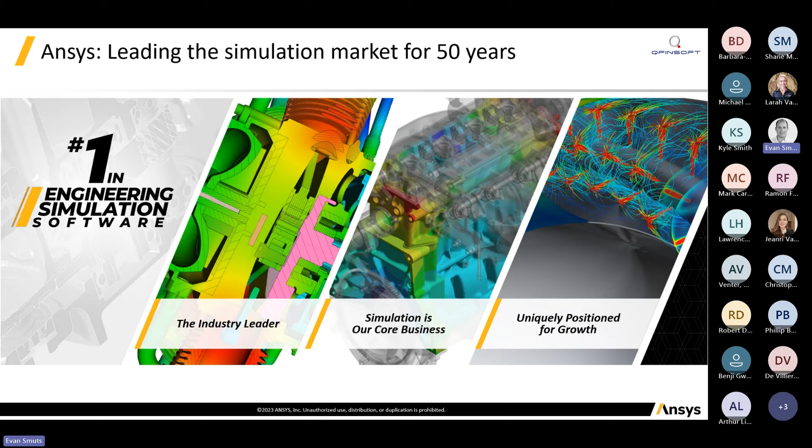And more specifically, how do we integrate those products together to give you guys the best experience and the most efficient workflow that we can. So thinking a little bit more about the bigger process, as users, we tend to get stuck in this one area where we're just simulating our particular product. But that is often just part of a much bigger workflow system.

We need to connect our simulations of certain components. We need to consider maybe different materials, what materials are available to us, what are we allowed to use, and those kind of considerations. Also, how do we then integrate our component that we're busy designing into a much larger system? So we talk about things like model-based systems engineering, and it's about designing our component as part of a bigger system. So essentially simulating the whole system.

Those aren't necessarily all Ansys simulations. Those can be brought in from other packages as well. And then it's also about linking that as part of a much bigger design management process. So we've got our SPDM, our simulation process data management system. How do we share our simulation knowledge and findings with the rest of the team? And then as they make changes, how do we receive those?

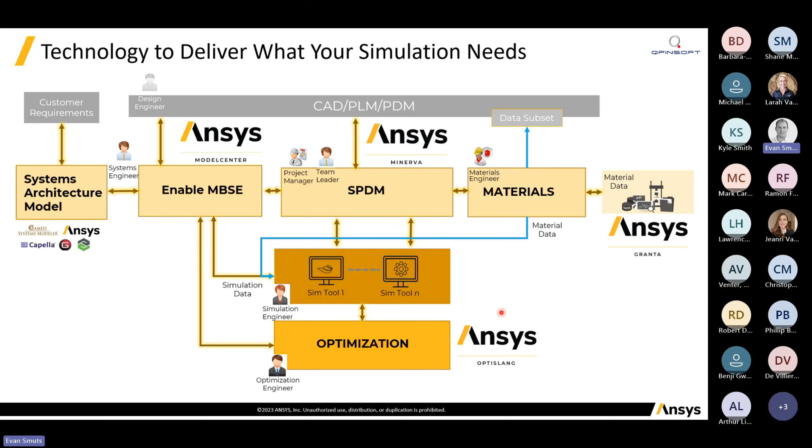So there's a much bigger system at work here. So just keep that in the back of your minds. But for today, we're going to focus mostly on the optimization side of what Ansys can offer. All right, so when we talk about optimization, what exactly do we want to do and how can we achieve an optimal design? So starting off, most people just think of a single design point that they operate at, and they want to find the best design at that particular operating point.

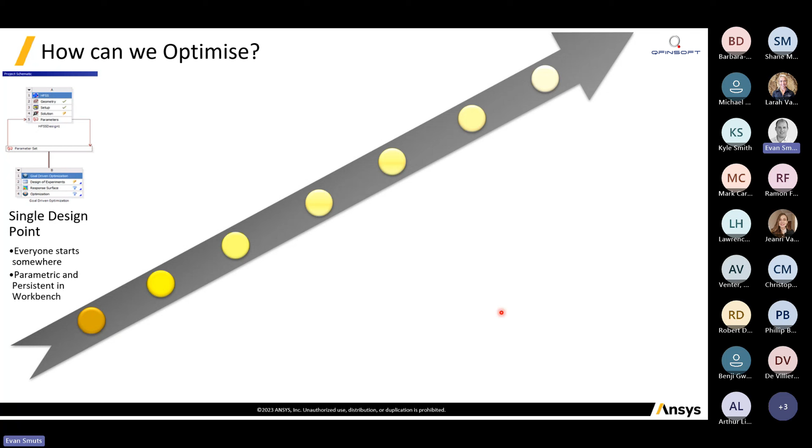But sometimes we need to understand that design point a little bit better. And so that's when we can look at something like sensitivity analysis. So this is where we try and identify what are the most important parameters in our particular design. So we look at certain variables, certain parameters, and we can see how they are linked together. Are they tightly linked or very loosely linked? Which parameters have the most effect on the design that we have?

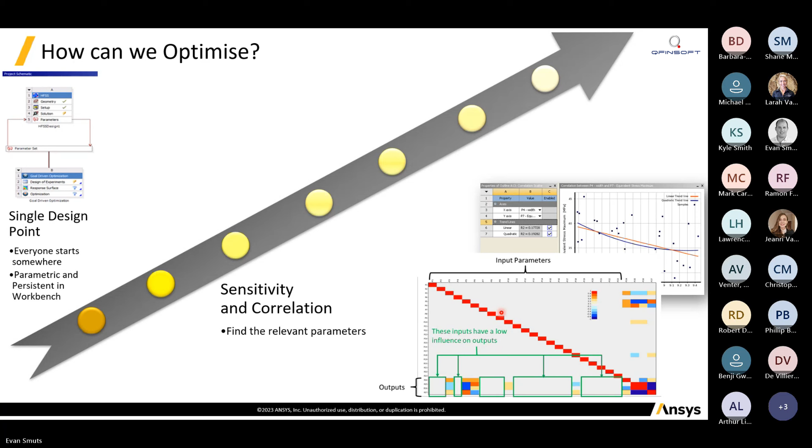Okay, so you could do that either with one design or with many, but sometimes we need to say, what if we change the design? How does that affect our goals, our target requirements? And so we need to then run a much larger study of multiple design points.

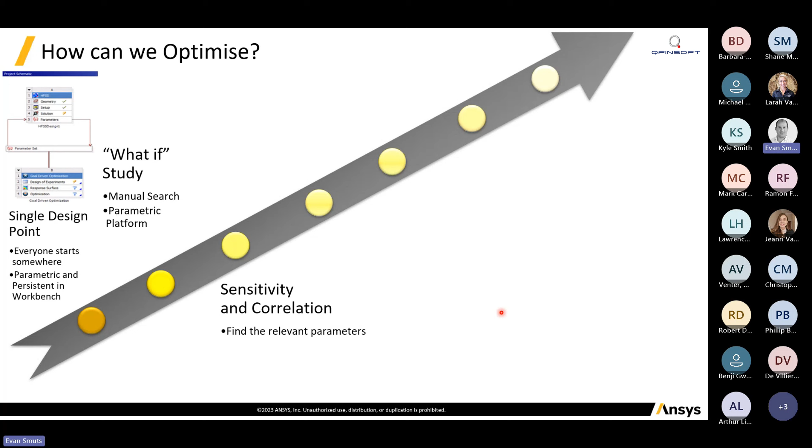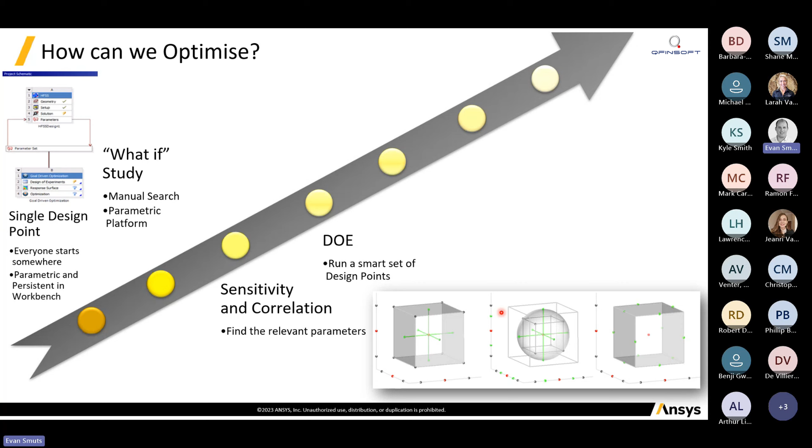So we can get some help in this using a design of experiments analysis. So this helps us identify how we can minimize our set of parameters going into the model, so that we don't have to run hundreds and hundreds of different combinations of design points. Okay, so this just helps us to minimize that field of inputs so we can get to our answers more effectively.

Then from there, we can take all of those many simulations that we run, and we can put them together into a response surface. So we build some sort of mathematical model of how we piece together all these individual simulations and try and get a general trend of how our design behaves. So we can start seeing, are these points that we've selected the most optimum design, or are they still far away from a potential high or optimum point that we can operate at?

Then once we get a sense of what is the design space we're working in, we can look at optimization. So either using the response surface from before, or just with other targets or inputs in mind, we can then go about trying to find what is our combination of design parameters that will give us our most optimum design based on our target design goals.

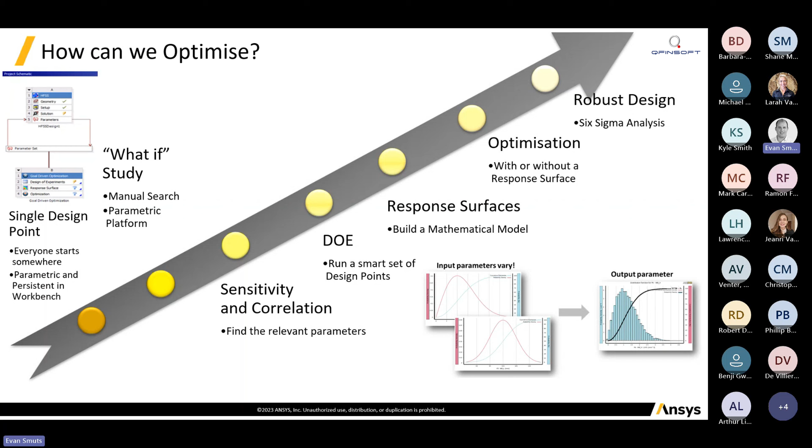Okay, and then lastly, we can look at something called the Six Sigma analysis, or Six Sigma is part of something we call robust design. And this is about understanding how robust our design is, how likely is it that we will actually operate at this design point. It's all very well we've optimized our design, but if it's an unachievable design, then it's also not very good to us.

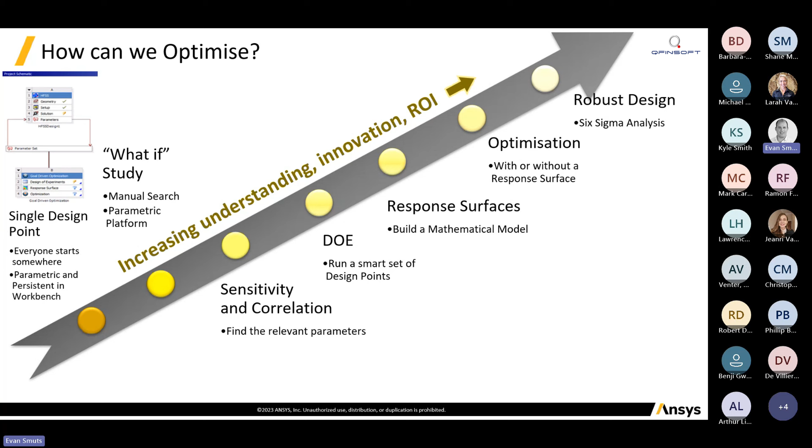Okay, and obviously as we move along here, we find that we get a much better understanding of our design and where we're operating, and obviously that leads to more return on investment. So as much as it's a lot of extra work, we do get a lot more value from this type of analysis. So just about understanding what needs to go into achieving these goals.

Okay, and then within the Ansys space, most of our products do have a basic parametric analysis tool within them, where we can set up our design space of all of our different points that we want to consider.

So particularly with products like Discovery, even the electronics products have something called Optimetrics that can manage this process where we've got multiple design points that we need to analyze, so that we don't have to go and set up like 100 different designs. We do it once and just change a few parameters from there. So obviously that's the most basic type of analysis that we can do. So it's a very manual process, but it might be a good start for a lot of people.

Then some of our products have a bunch of tools that we can think of as analytic derivatives. So this is where it actually looks at our field values that we've calculated through our simulation, and it allows us to actually change and adapt our model based on that. So something like HFSS, we can actually compute the derivatives of the S, Y, Z parameters, and then we can make instant updates to our design parameters to just tweak those values to a better setting,

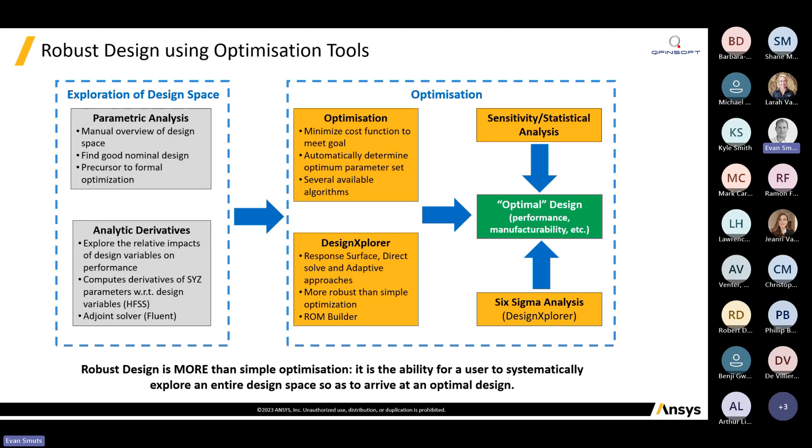But another point I want to make is that a robust design is much more than just a simple optimization task. There's a lot more than just looking at a bunch of different designs. And that's what leads us into the rest of the presentation that we're going to see today.

We often find, in product development today, there's three main challenges. We find that to get the best product, we have to put in a lot of manual work, and it's a lot of iterative process back and forth, and that can lead to quite a slow time to market. To overcome this, we need to somehow find a way to increase efficiency, try and automate things, and get results out faster.

We find that also we have lots of requirements that we need to meet, and how do we juggle between all these different, often conflicting requirements? And so, we need to find a way that we can identify the most important parameters to find the best trade-off and improve the product performance.

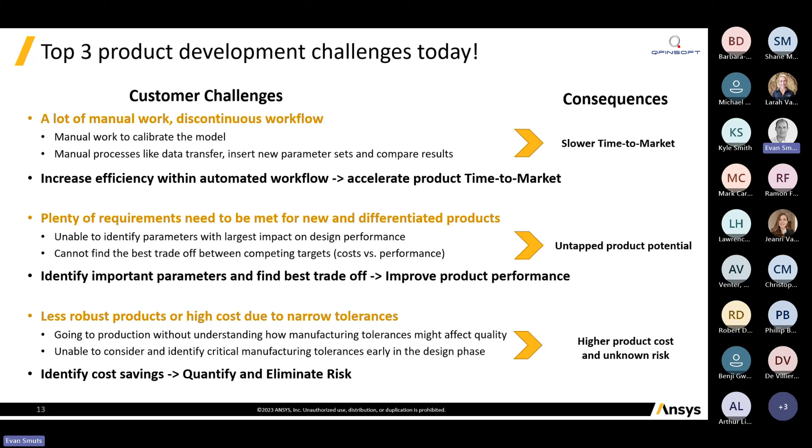And then, very importantly, we need to consider that the products are robust from a structural point, but also can we actually manage to build these, or maybe the tolerances are too high or too costly to achieve the goal that we're trying to achieve. So we need to identify areas of cost savings so we can quantify and eliminate any risk in our design analysis.

And this is where this PIDO philosophy comes in, this process integration and design optimization. That's what it stands for. So on the left there, we need to consider how do we integrate this optimization into our process?

How do we connect the different tools together to get a design that works across the board, not just in one specific package or physics analysis? How do we automate this kind of process to make it faster and more reliable? And how do we obviously make this a much easier process as well?

Then on the right, design optimization, that's the actual hard work of optimizing the design. So how can we achieve that goal, but hopefully reducing some complexity in terms of the work to get there, and maybe even the design itself? And then how do we verify that this design is actually a design that we can meet and actually manufacture, and does the job reliably every time? And obviously this is with these goals of shortening the time to market, improving product performance and eliminating risk.

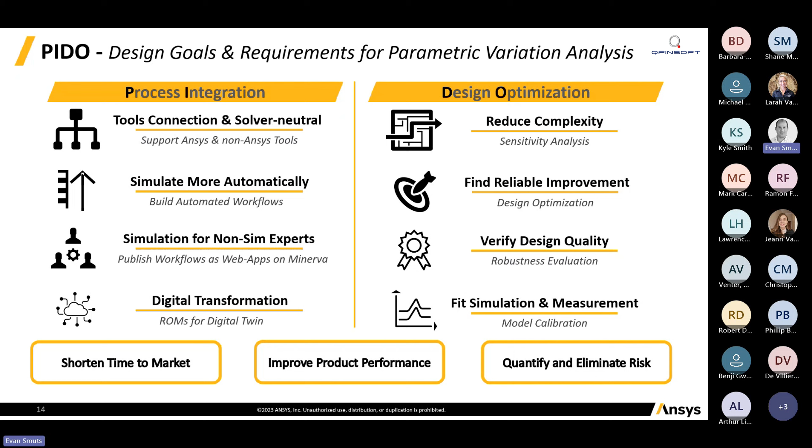So within this kind of workflow, there's a couple of different ways we can arrange this, depending on what works in terms of your company and what your end goals are. So obviously we need to find a way to integrate these workflows, hopefully try and automate them, speed them up. But then it's also how do we get that information to our end users? Maybe we need to publish them in some sort of web platform where they can access this information remotely, or is it just about publishing the information locally to our colleagues in the office?

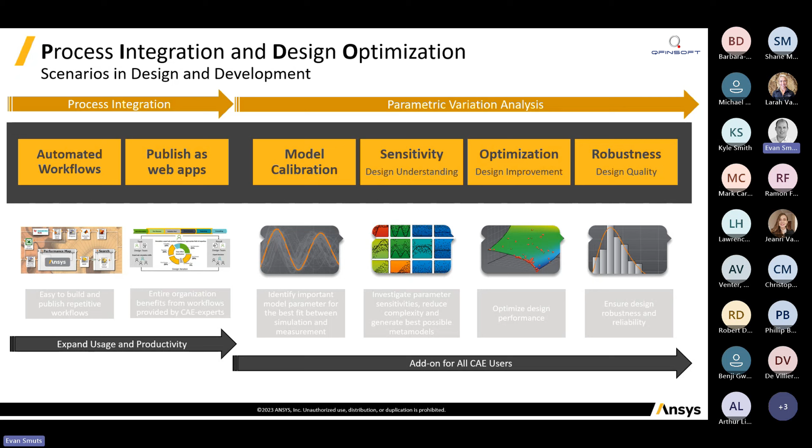Okay, and then how do we link that with a parametric analysis as well to optimize our design? So do we bring the parametric or the optimization analysis towards the end of our workflow, or do we somehow try and work it into the process? So obviously we want to automate, but do we automate and then optimize and only then release our results?

But maybe a more optimal workflow would be to actually try and parameterize and optimize our design up front, so that we can then knock out all the designs that we're not interested in, focus on the areas that are important to us, and only then do we try and automate things and then publish that information to our other users or clients.

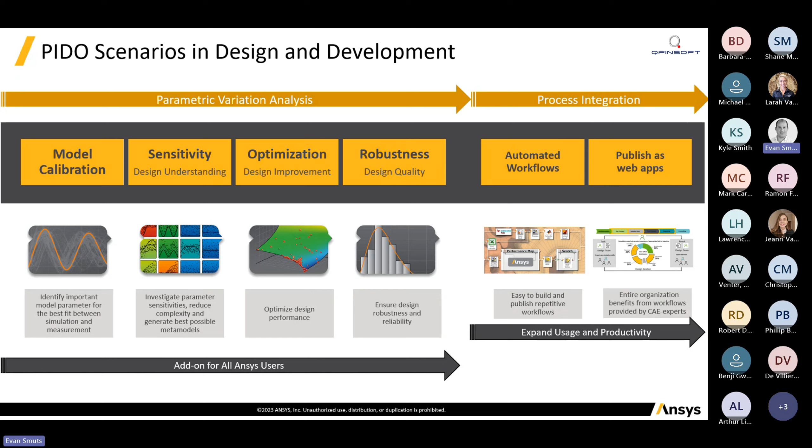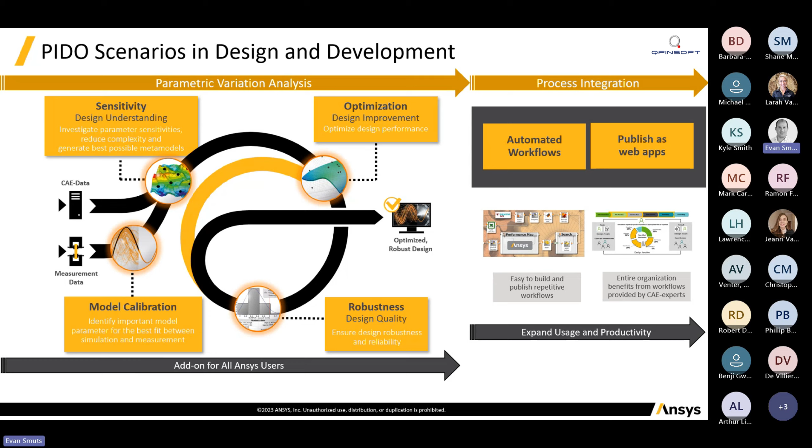Okay, and however way you slice it, we feel that for the whole optimization process, we need a really good solid tool to work in this space to allow us to provide an optimum design that's robust and also hopefully well automated to make life easier. And this brings us to the main focus for today, looking at a product we call optiSLang.

Okay, so this is a platform that we have to build up these workflows for parametric analysis. The idea is that it's super flexible. It can be coupled to multiple different solvers, not just Ansys solvers, but also third-party products as well. Something like MATLAB, Abaqus, maybe other CAD packages as well. They can also be integrated into this whole workflow. So the idea is we make it universal and easy to use by pulling in all these other different products.

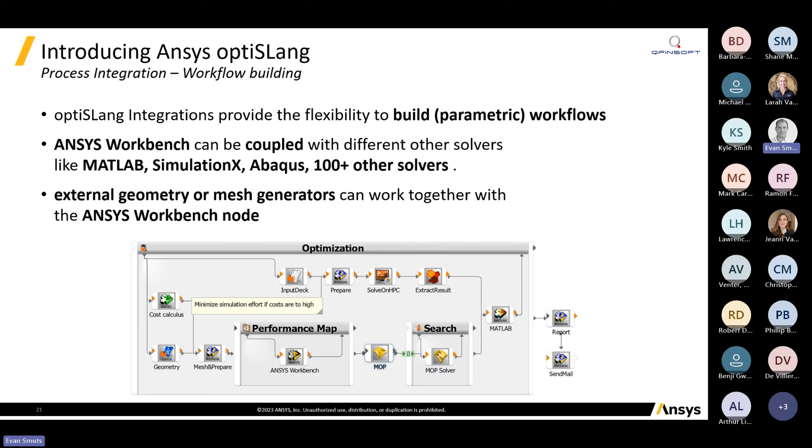So how do we go about integrating optiSLang into our workflow? One of the easier ways to do it is to work from the Workbench plugin. This is where we are working in the Ansys Workbench environment, which I'm sure many of you are familiar with, creating different design workflows, linking different physics packages together. We can now build our optiSLang analysis off this design.

Okay, so once you've set up your initial design, in this case a static structural analysis, and once we've defined a whole bunch of input and output parameters, you will see this parameter set block here that will be available in Workbench. And then we can link all of our different optiSLang analysis blocks to that. So doing a sensitivity study, optimization study, whichever combination we feel we need to do, that becomes available there.

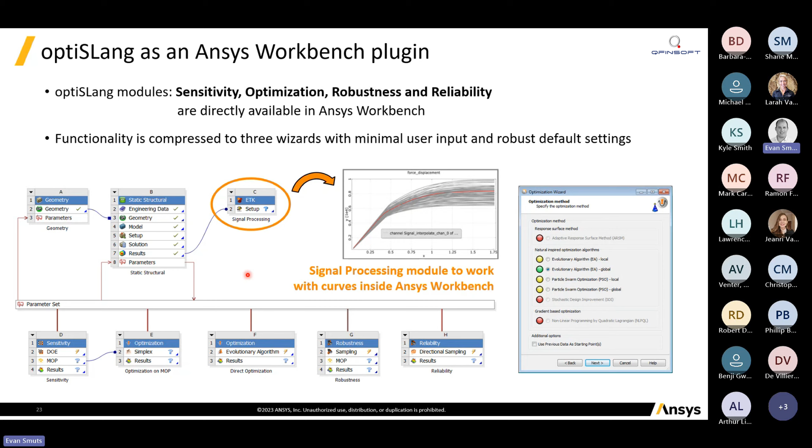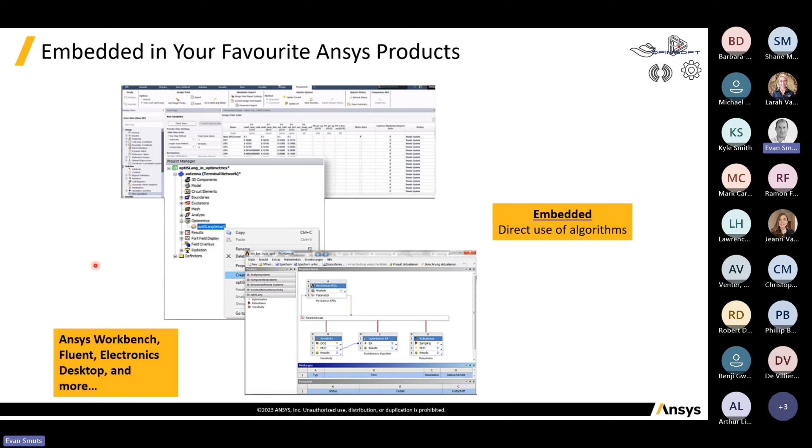All right. So the idea is to make it easy to use, so that you can work in whichever interface you feel happy with. So it's not just working from Workbench. Certain of our products actually have optiSLang integrated into the user interface. So, for example, Fluent or electronics products through optiMetrics, there's a direct link to optiSLang so that you can work in whichever environment you're most comfortable in to set up your analysis.

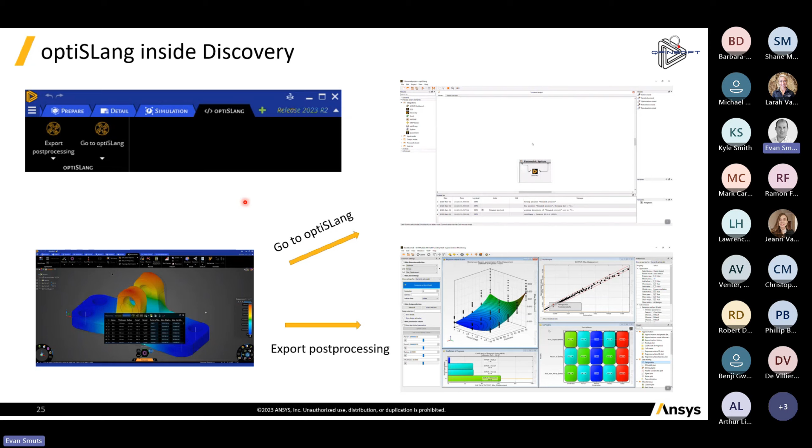So we can either export our data and open it up later in optiSLang, or we can actually load optiSLang directly, and a Discovery connecting block will actually be created in optiSLang, and then we can work from it there and integrate it into a more detailed analysis. And then obviously we can work within the optiSLang GUI environment as well.

So the idea is that it's sort of a blank slate. It's very similar to Workbench, in that we can drag and drop in different modules depending on the type of analysis we're doing. And so it allows it to be quite flexible and easy to use to customize whichever type of analysis that you're trying to do.

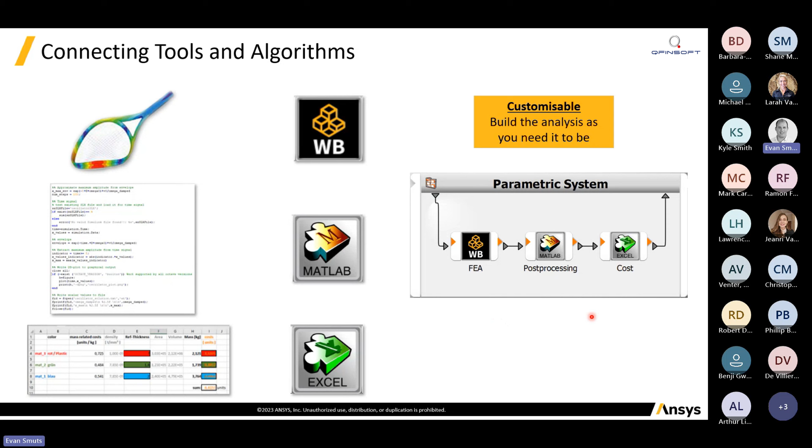So, for example, if we want to bring in our Workbench model here, maybe a finite element analysis, we can then have maybe a MATLAB script to either optimize the design or measure something from the design that we've created. And we have maybe a cost function within Excel. So here we've built up our model piece by piece, and created our own custom analysis.

Another nice example here is bringing in Granta for materials analysis. So we have our materials library feeding Discovery, and then we actually have both a cost and a carbon calculator from that, so we can quantify how good our design is from a cost point of view, but also from an environmental friendliness point of view. Changing materials might affect that, but still give us the performance that we require from the component. So we can get quite creative.

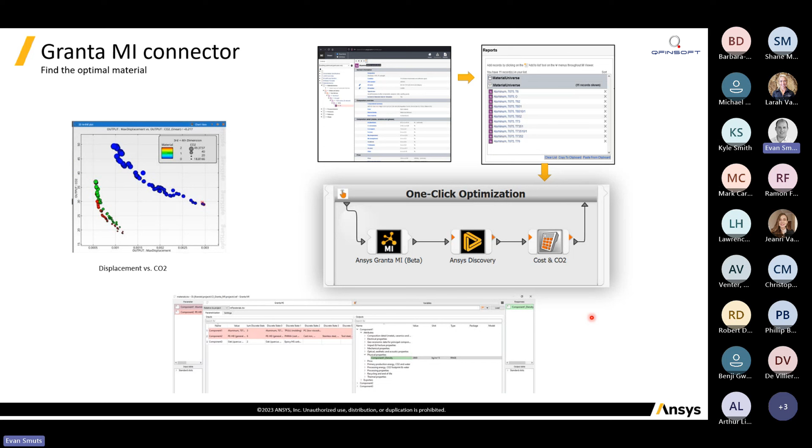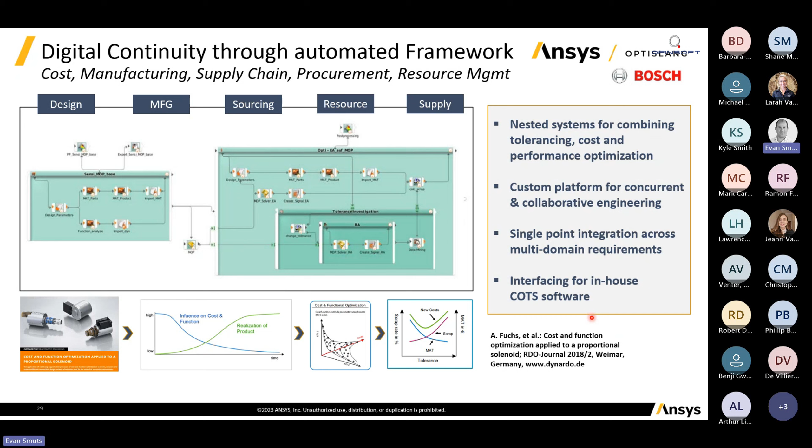Okay, so how does optiSLang work, and what is its functioning? Because we'll see some of this terminology over a few more slides down the line. So basically, optiSLang works on something we call a meta model. A meta model is essentially just a model of a model. Meta modeling is the process of generating these kinds of models.

So the idea is that optiSLang will build these meta models from our analysis, and the idea is to give very quick feedback. Obviously doing a full 3D simulation is quite time consuming, but if we can work on a much higher level, simpler model, we can get much better feedback much more quickly, and then we can analyze a lot more different designs. Okay.

So typically, when we work with hundreds of different parametric designs, we need to say, well, what happens in between the design space? Maybe there's an optimum that we don't really know exists. But obviously, we need to try and automate this. And this is where the meta modeling approach comes in and says, okay, how can we just mathematically describe our design space? But then also, how do we link all of our different criteria together?

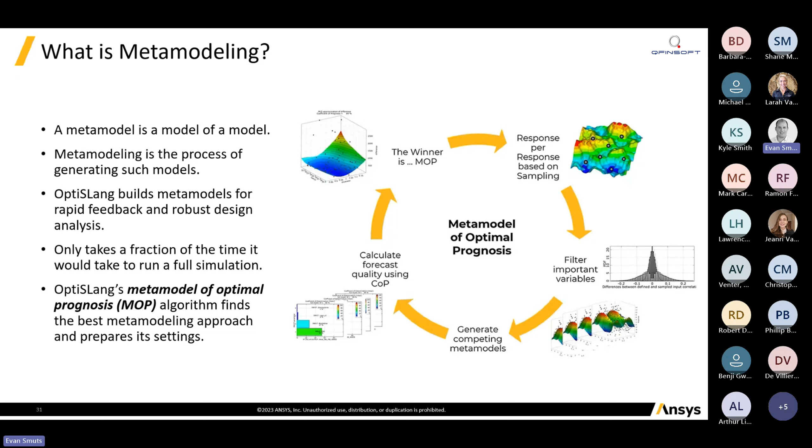So the idea with using these machine learning algorithms is that we use them to guide the simulation, to find the most optimum design and try and get rid of any random results or results that don't meet our design criteria. And this way we can improve efficiency and also get to the important criteria of what actually drives our design, and then we can understand our design much more deeply.

So finding the best meta model approach can actually take a lot of time. There's a few different methods out there. I should actually talk about the MOP. We talk about a meta model of optimal prognosis, the MOP. So this is just the name of the meta model that we use within optiSLang.

So it's based on essentially an automatic machine learning algorithm that finds the best approach to actually get us the result. So it takes a look at the design, the data set that we have, and looks at certain criteria, and that way it can find the best meta model that we need for our particular analysis. And we call that the adaptive meta model approach, or the AMOP, as you might see in some of the literature.

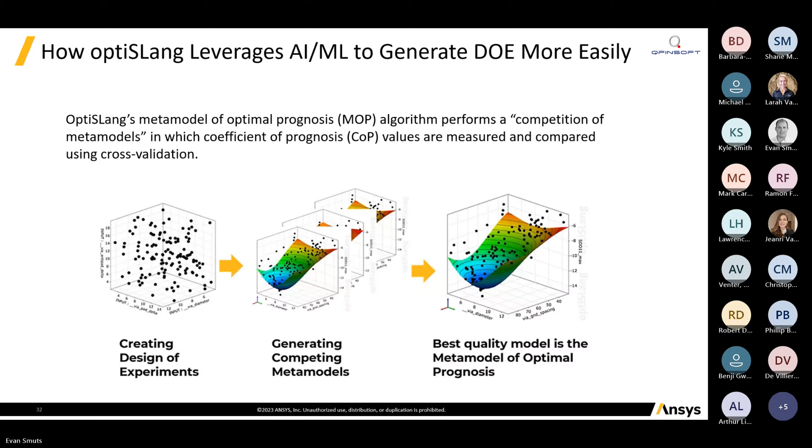Okay, so the idea behind this is that what the MOP does is it essentially runs through your design set, finds out which values have the most influence, and then it can focus in on those areas and populate more design points in those particular areas, giving us better resolution and therefore also better confidence in our results.

And then all of this happens quite quickly. In the latest version of optiSLang, we call this a one-click optimizer. So the idea is that it takes a lot of the work and decision-making from the user and looks at the results to determine the best algorithm to use. And so you can get going much more quickly, but still have the confidence that you're going to get a good answer.

Okay, so we find that, using these AI machine learning techniques in tandem with 3D simulation and also these other CAE tools, we can significantly enhance the design exploration phase and the optimization phase of our design, getting to a much more automated workflow, which will ultimately make things far more efficient.

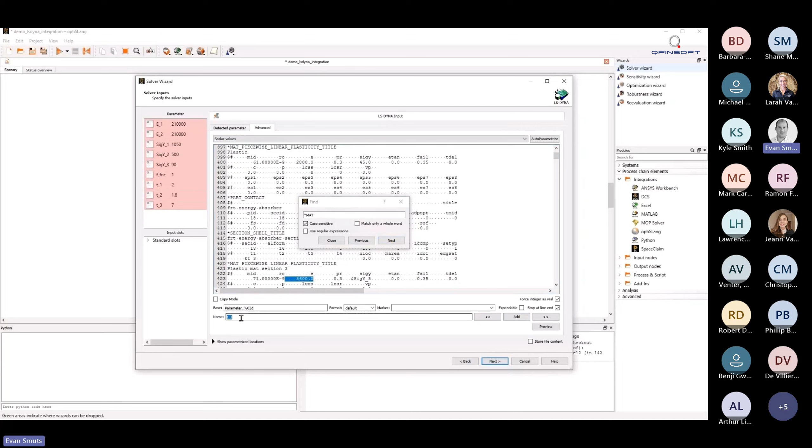Okay, so I've just got a little video here to run through the optimization process. So we'll look at the process integration part of optiSLang and how we can go about setting up a model. It's a little bit sped up, but the idea is that we can build our model from multiple different products. In this case, we're bringing in an LS-DYNA model, and we're actually using the input script from that LS-DYNA model to set up our analysis.

So our input parameters are actually copied from the input script, and then we can also define what we call the responses. Those are basically our output parameters. So once we've defined not only what the input and output parameters are, but also what range they work in, we can then define our objective function. So this is what we are going to be targeting to optimize. And then we also define our constraint equations, which basically define the limits within our design space.

Okay, and you can see here, we've created our basic little workflow with our LS-DYNA model. And then obviously we can also drag and drop additional components into it as well. So we've got our LS-DYNA solver there with an Excel cost function as well to calculate additional criteria.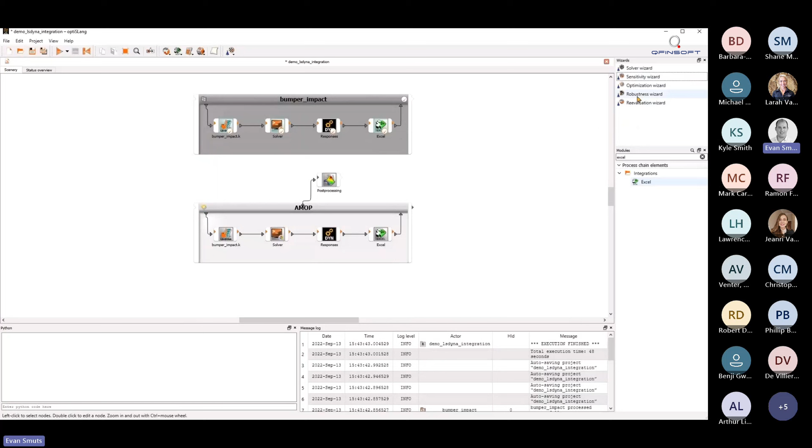And then at the end, we can also select the algorithm that we want to use to solve. In this case here, we've got our AMOP model that we've created, and we're bringing in our optimization wizard to then take that meta model, and then we're going to optimize based on that, in this case using an evolutionary algorithm. So you can see here, it's a little sped up, but the process is relatively quick and easy to build your analysis from all the different individual pieces that you need.

Okay, then looking now more at the design optimization. So what do we do with this model once we have it?

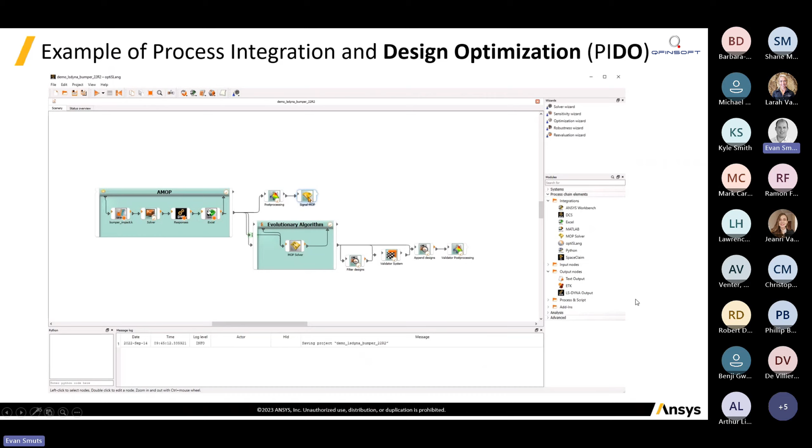Okay, so from our model, it generates an output, particularly looking at our coefficient of prognosis. This is basically linking all the design variables together and saying which variables are the most impactful on our design, which ones are the most connected, and in what sort of side of the range we are looking for the best design. And then from this, we can go and generate different types of plots.

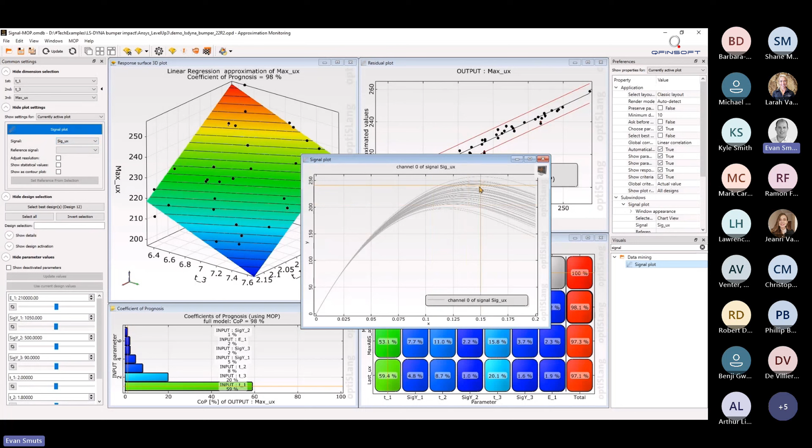So we can look at maybe all the different variations and see where we are in terms of our optimal design, so we can get a much better understanding of the design space that we operate in.

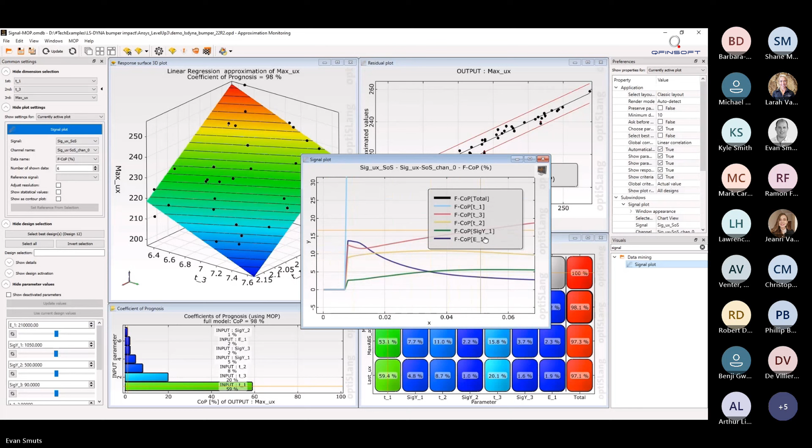Okay, now focusing on some of the more specific features within OptiSlang and what sets it apart from, for example, a Design Explorer or something like that. So obviously the basis of any task that we're going to do within OptiSlang is a sensitivity study. The idea is that we want to understand and characterize all the different variables or parameters that go into our model and see which ones are the most important, because obviously we don't want to optimize the ones that have very little relevance to our design. So we start off building our meta model and then doing a sensitivity analysis on that.

And often when we think of sensitivity, we'd look at just single parameters and see how that single parameter varies. But it's not always obvious that that value is going to give us the resulting data if we just look at that single value. Maybe we need to look at something a little bit bigger. So we can look at maybe a whole signal input, an input that varies, and see whether something within that signal actually drives our optimum design.

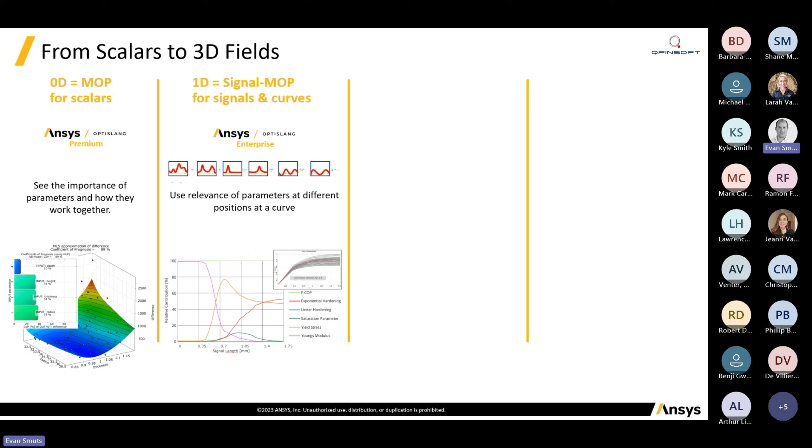Or in terms of physical space, we can also look at how a variable value varies over a certain area, maybe over a 2D surface area. How does the parameter field vary? And maybe we need to find an optimum somewhere within there. So we actually need to affect the entire surface, not just one particular point or one scalar value.

And then we can also do this in 3D as well. So it's about what is the optimum design over a whole 3D component, and not just finding the average value, peak value, something like that. Yeah, so that is quite a powerful extension over just a simple sensitivity model.

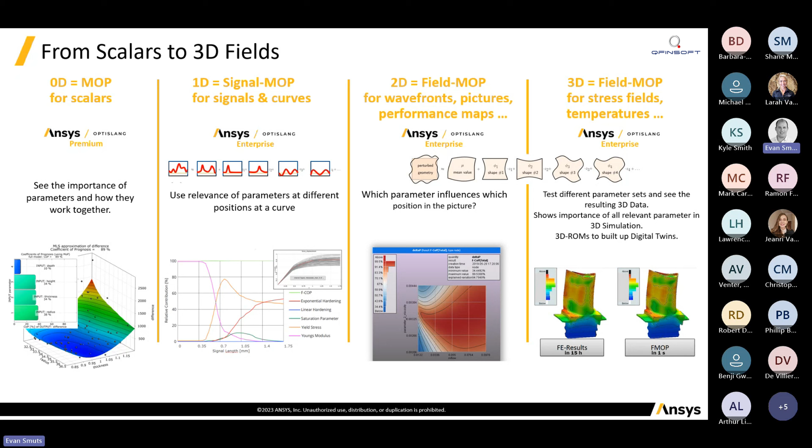We then need to consider the robustness of our design and also the quality of it. How can we actually achieve the optimum design that we have? Because obviously it's not very useful if our optimum design is not achievable, or maybe we need such high tolerance that it's just not practical or cost effective to achieve. So it's about how we can measure our design based on something more than just the optimum, something more of a quality metric.

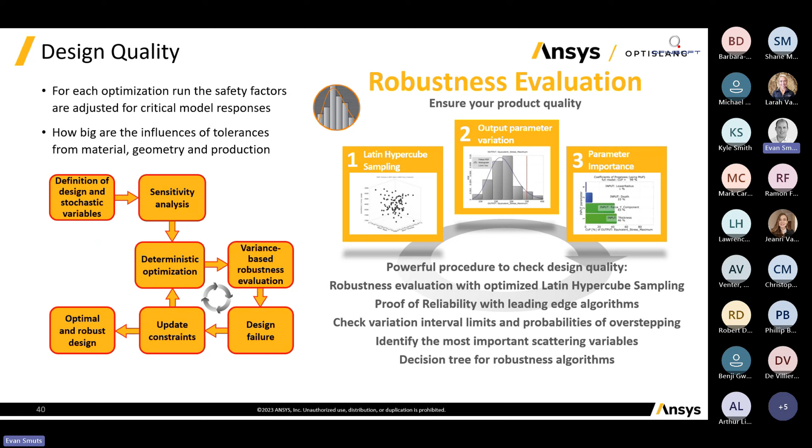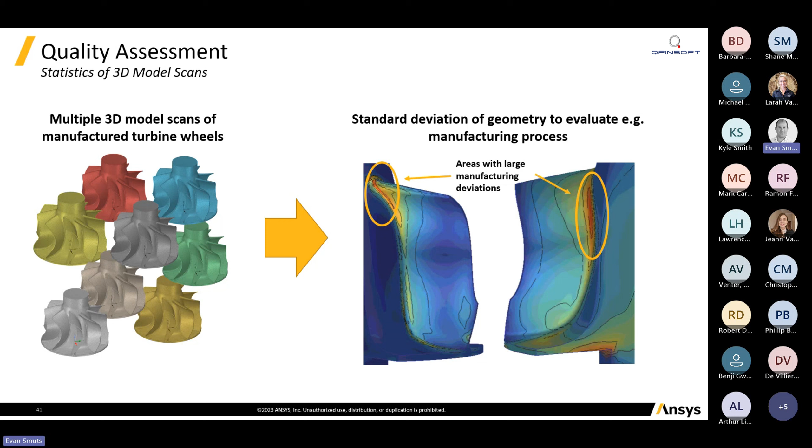So in this case here, we can actually generate a map of the areas of the highest deviation from our design shape, and so we know, okay, those areas are probably going to affect the performance because we have the least control over those specific areas.

So we can then take this shape, we generate that 3D shape from our different scans, and we can then put that into a simulation and see, okay, based on the variation that we expect in the design, what is the result variation that we're going to get?

In the case of this turbine wheel, maybe it's what is the real pressure drop that we're going to experience across here? What is the range that it's going to vary, and how bad is that compared to what we designed? Yeah, so it'll actually take the geometry and morph it into the different range of those extremes of what we've measured.

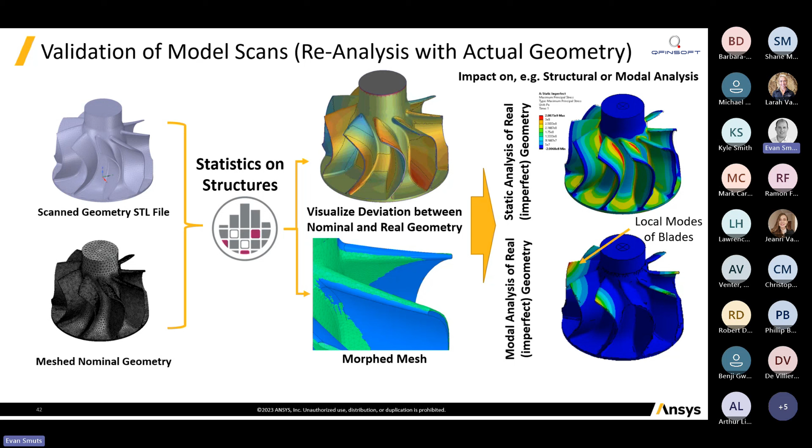Sort of a slight variation on this project done by Siemens. So this is actually looking at the turbine casing for a gas turbine. And so what they also did was measure the geometry and essentially created a sort of measure of all the different thicknesses and how they vary across the design.

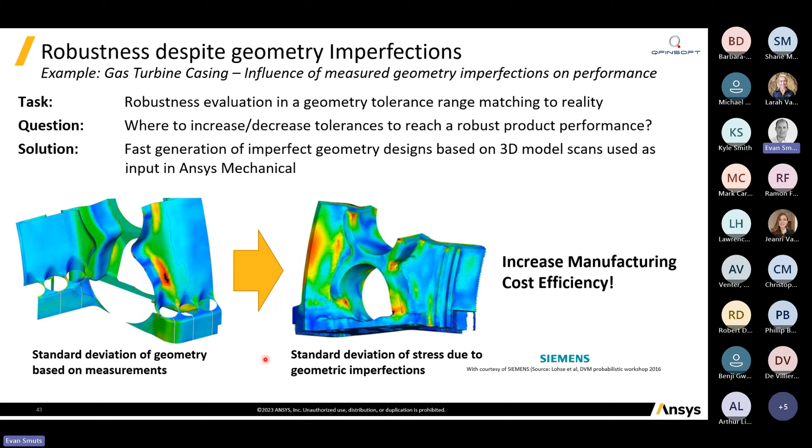And then we can go and look at, in this case, what is the range of stresses that we expect based on these imperfections in the design, or the variations in the shape that we can expect. So that's quite a handy tool to understand, can we actually meet our design targets, and can we trust the quality of our design?

Another interesting use case is looking at not only just the performance of the object, but the cost performance as well. So in this case, we have a particular design where obviously cost was a big aspect of the design apart from its actual structural performance. So considering things like material cost and manufacturing costs, we found a design that still meets our criteria of deformation and material stress and so on. But we could actually then reduce our manufacturing costs quite significantly.

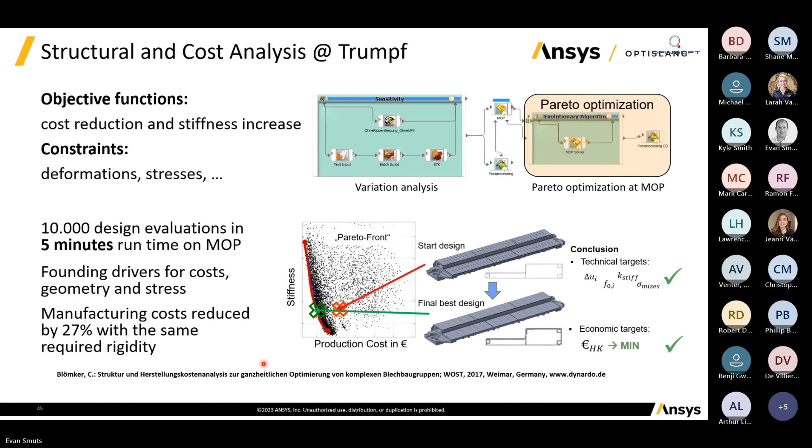All right, so it's not just about the physical structure itself, but can we look at time and cost as a metric for optimization as well? Okay, so now I want to go on to a couple of different use cases here, where we can see how OptiSlang has been used in some different scenarios.

So the first example here is looking at an electronic PCB. So we have a PCB with a few different chips on them, as well as heat sinks. Obviously, during operation, we expect this PCB to get quite hot. So how do we now optimize our airflow, optimize our heatsink components to make sure that we get a design that is going to be reliable and safe to use, and it's not going to overheat?

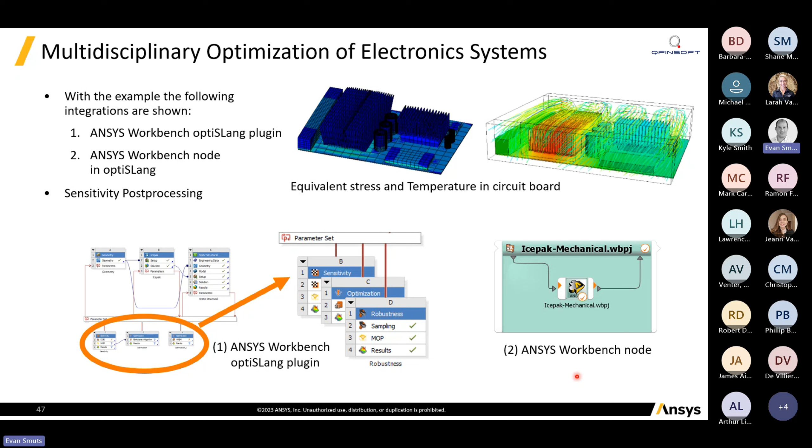So this can be done through Workbench. So we have our geometry module over there, which feeds into our Icepak thermal analysis, and we can actually look at a static structural analysis, in this case for deformation of the components due to the thermal distortion. And then down here, we can see we have our OptiSlang setup. So this can either be done through Workbench, or you can actually build in an Icepak node within the OptiSlang interface. But now specifically looking at the results.

So the goal of the analysis was to minimize the stress and deformation in the components. So that's the objectives from the FEA side. On the CFD side, we also have our own objectives in terms of minimizing pressure loss and thermal resistance. So obviously, we've got two different physics that we're considering, and both have their own objectives that we want to try and meet. Maybe this is two different design teams that are also trying to meet their targets.

So how do we now keep down the mass and the temperature of the heat sources and make sure this all works as expected? In this case, we're basically playing with the heatsink parameters, so the number of fins, the thickness of the fins, and also the flow rate. And in this case, we can even vary where we position the fans in the housing. Okay, so there's a lot of different parameters that we can change within here.

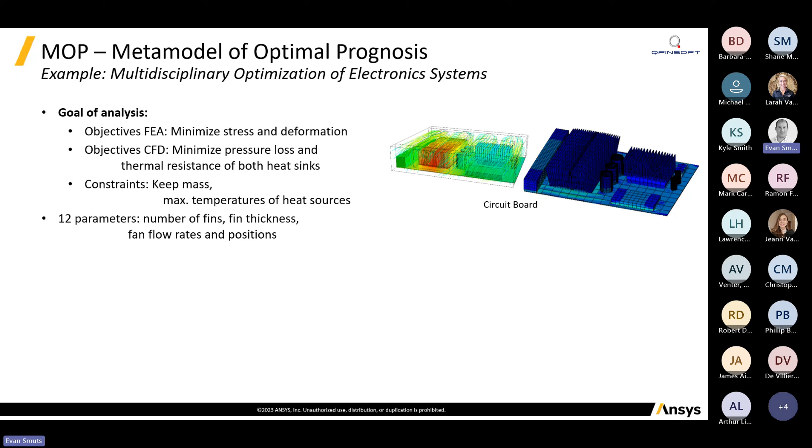So again, how do we find the best layout and what actually is going to have any effect on our goals? So here we've conducted a sensitivity analysis, in this case over 100 designs. Obviously, not all of them simulated. Some of them would be filled in with the meta model. And we can now have a look and try and quantify which of the different parameters have the most effect here.

So if we look at this table here, this is our coefficient of prognosis table that quantifies how the different parameters work relative to each other. On the bottom here, we can see the different parameters that we've tested. And then on the left here, we can see which of our targets or goals have been affected.

So from this matrix, we can see that, out of all the 12 parameters that we could change in the design, only really 10 of them have any real influence. And in this case, if we look closer, even a few of them have actually very little influence as well, if we look at the numbers, and obviously these blanks here indicate very little, or essentially zero influence. Okay.

So in this case here, we can see that, and also if we look at the response surface here on the right, we can also see that we get quite a good fit. We don't have too many outliers in our design, so we can therefore have a little more confidence in our results.

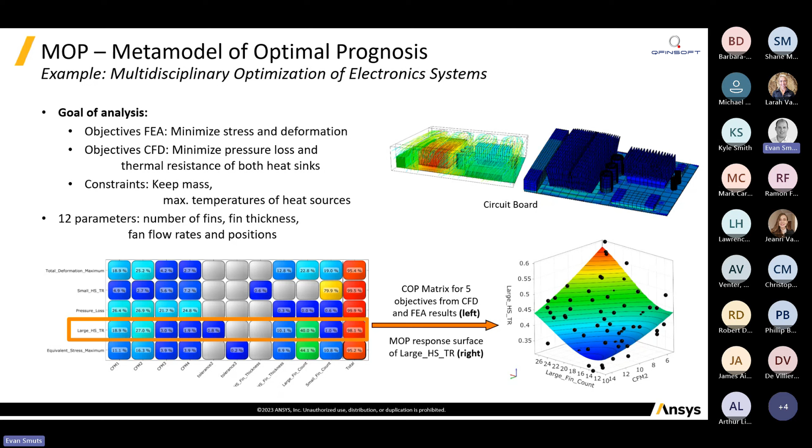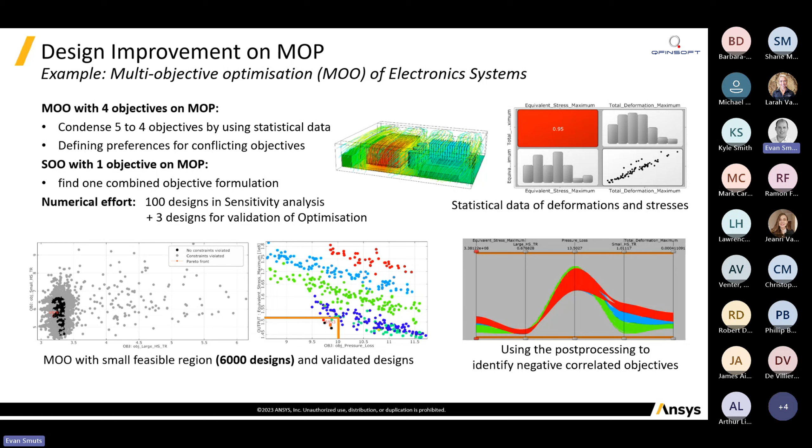Okay. So there's a number of different metrics that we can use here to analyze it. I have another little video that will just quickly run through setting up the model, as well as analyzing the criteria. So what we see now is a typical setup within Workbench, a typical parametric model with all of our different design inputs, or parameters that we've defined in the different components. So you can see there that we have a geometry block, our Icepak model, as well as our static structural.

Now we're dragging a sensitivity analysis into Workbench, and that links to our parameter set. From that parameter set, it automatically picks up on all of our different inputs and outputs that have been defined, and we can specify the different ranges available to them. Okay, so on the top left here, you can see we have a list of parameters and list of objectives that we need to look at.

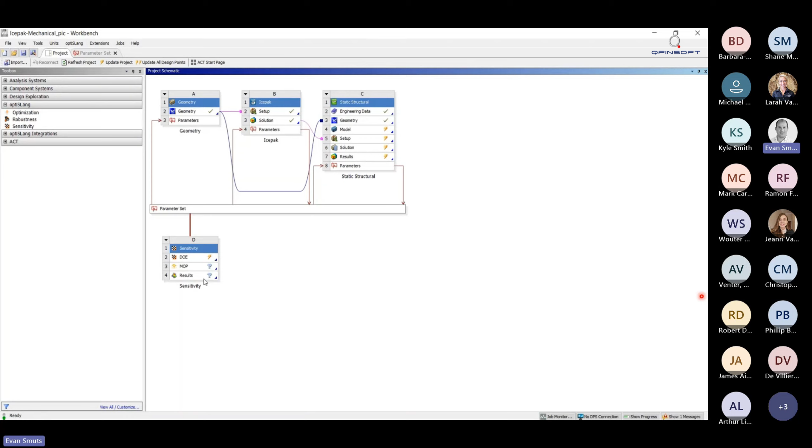And now we're defining the type of sampling method that we're using to set up our meta model. optiSLang uses that kind of traffic light system to try and guide you as to which would be the most appropriate algorithm to use for this particular case. Okay, so now that we've finished with that setup, it's just busy updating our meta model.

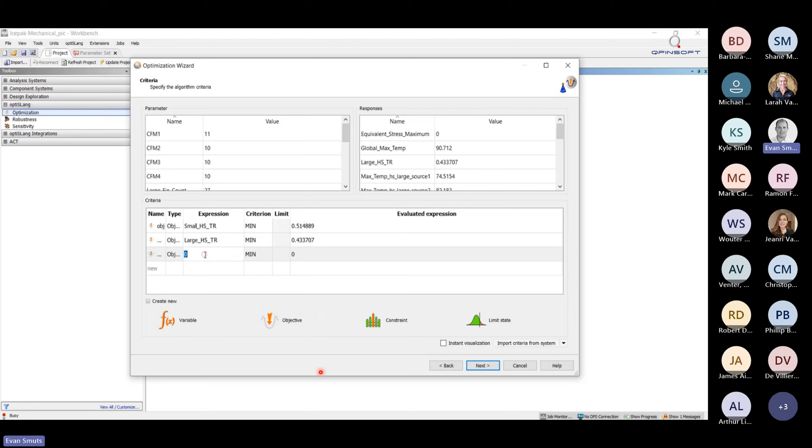And now we are bringing in an optimization onto our sensitivity study. So we've done the sensitivity study. Now we're going to optimize it and use the parameters that have been highlighted by the sensitivity study to optimize our design. Okay, so we're busy now adding certain criteria. These are our objective criteria here. These are what it's actually going to be using as a target or a goal for our design.

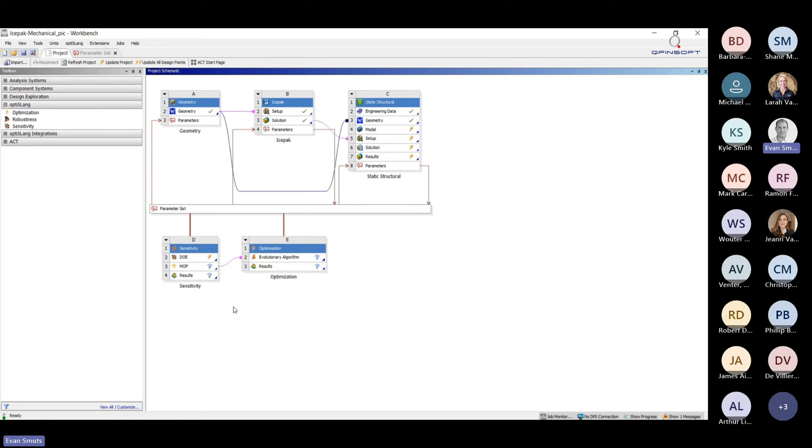And then we move into the next stage, and you can see here it's indicating that we want to use an evolutionary algorithm for our setup. Then we can update that design, and it will fairly quickly generate the optimization results for us. Okay, and so now it opens up our optiSLang interface.

So you can see here that we are now, in this case, working from the optiSLang side. We're not actually working from Workbench. So we're just defining our project within optiSLang so that we can then do some post-processing. We're telling it which are our input parameters, and which are the responses that we want to see in our output data. And then we can run our analysis.

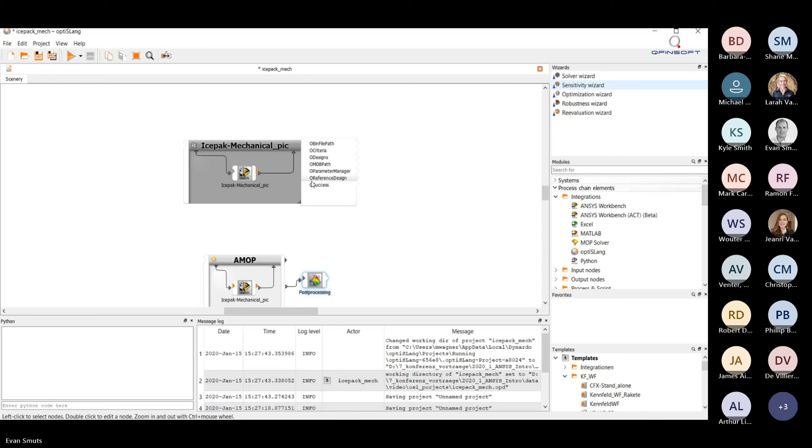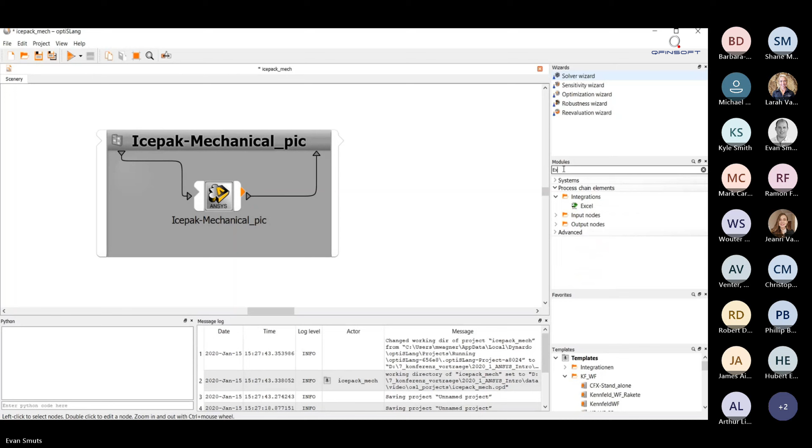Okay, so you can see it's created our Icepak mechanical workflow there, and we can add to that if we need to, so we can build and customize our design a little bit further. Now we're seeing that in the Icepak mechanical node, we can add different inputs or outputs and connect the different blocks together to build our custom model. Yeah, so we're just dragging in Excel there to help do some calculations for us.

And also a MATLAB script. So obviously, I should note that you do need these packages installed on your machine if you want to use them. We don't provide MATLAB, for example, so you will need those packages to be able to use them.

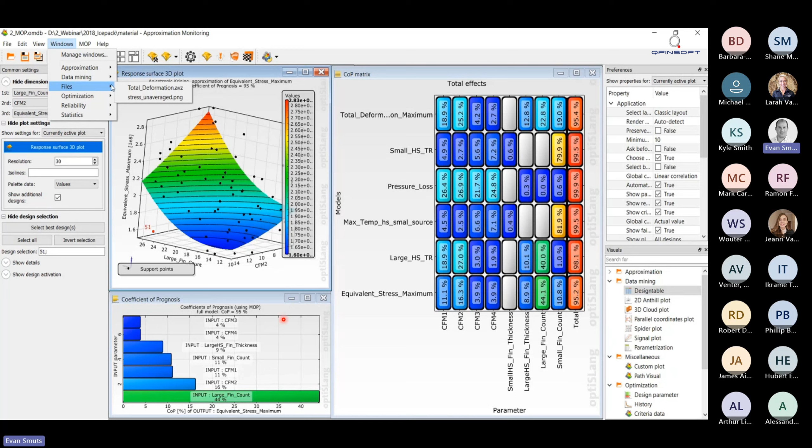So now that we've run our analysis, we can have a look at the results. So you can see our CoP matrix on the right there, as well as our individual COPs at the bottom. If we double click on a certain combination within our field of view, it will then also highlight the specific combination in the little graph there and in our graph plot over here.

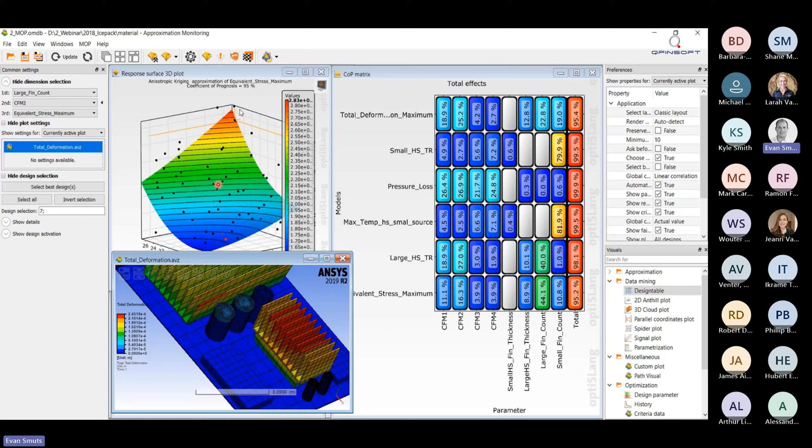What we've just done now is add a visualization of our stress results. So this is the mechanical stresses in our 3D model. So if we now go and select different design points, that's what we're doing here, you can see that the number of fins and the thickness of the fins and all of that will update to our current selection. Okay, so these are our values that we can then look at the individual results.

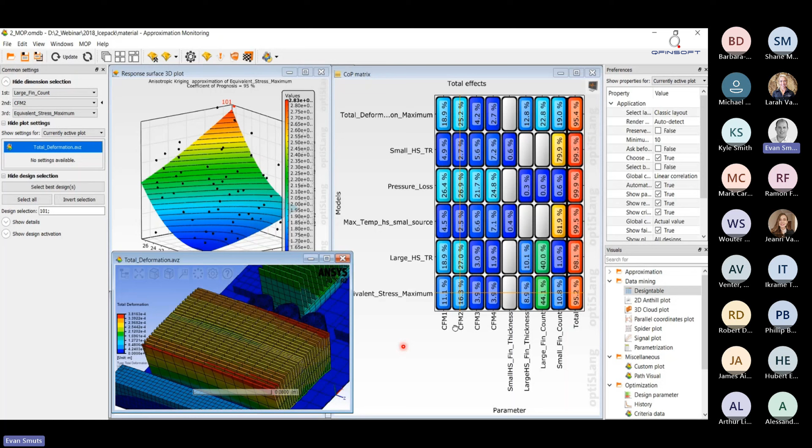So you can see now once they're rotated around, we've got a much thicker, denser distribution of heat-sink fins, and we can actually see the deformation of those fins together. And you can see some of them in the middle there might actually be touching during their deformation.

Okay, I know we're running a bit tight on time. I just want to maybe do one more example, just so they can get a feel for some other uses for OptiSlang.

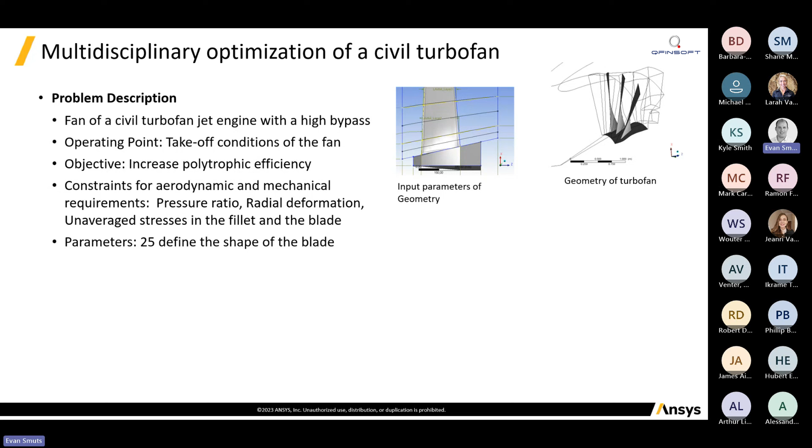So now we're looking at, in this case, a turbofan for a civil aviation jet. So here we are taking our input parameters from the geometry. So this could be BladeModeler or something like that. And then we link that into a much more complicated model where we bring in CFX, TurboGrid, do structural analysis, all of that. And then we do our OptiSlang analyses on top of that.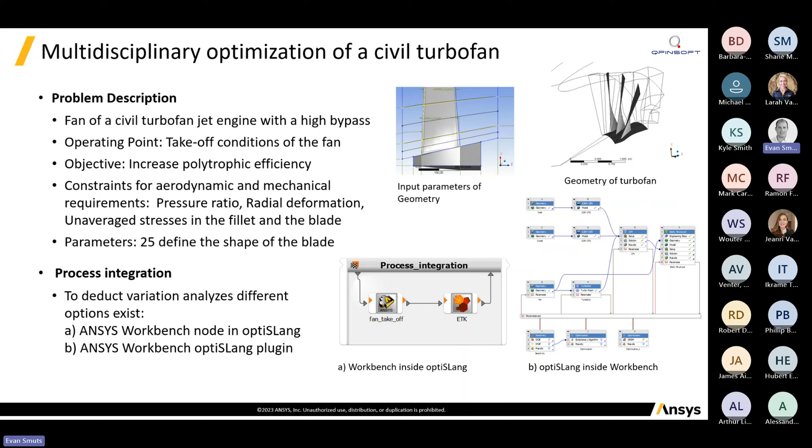Okay, so in this case, we are looking to optimize our polytropic efficiency through the turbine. And we can change, in this case, 25 different parameters that will affect the shape of the blade. All right, so in this analysis, we obviously need to do a sensitivity analysis, see which values are going to have the most bearing on our analysis, because we put in quite a few input parameters.

So from the analysis there, we can step by step go through everything. And in this case, we can see that our meta model has a reasonably good relationship there of 66%. And we find that 8 input parameters have the most influence on this response. Okay, so we can now focus our analysis particularly around those values.

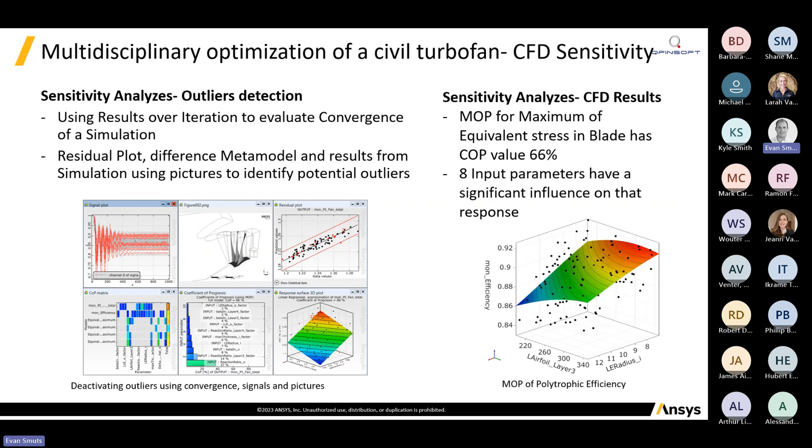But maybe in this case here, 66% might not necessarily be the best that we are looking for. We feel we can do better. So how can we then go about trying to improve our accuracy or reliability or fit of our different data points? So one way to do this is, before we take the step, we can go and deactivate some of the outliers. We can go from this plot and actually remove them from the analysis.

Maybe these guys at the top are just so far out of the way that we just don't want to consider them as possible input parameters. So we're narrowing the scope of our model. Or we can go back to the actual constraints that we put on the model. Maybe we split up some of our constraints into a few smaller ones, so we're not trying to change too much in one go, or split it up in different regions of our model. Maybe that will help.